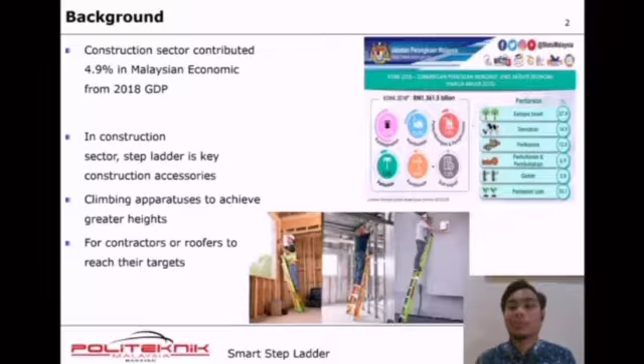Step ladders are also useful in the house or garden to reach things that are not too high, such as the ceiling. The challenge with the traditional step ladder is that it needs to be manually moved around.

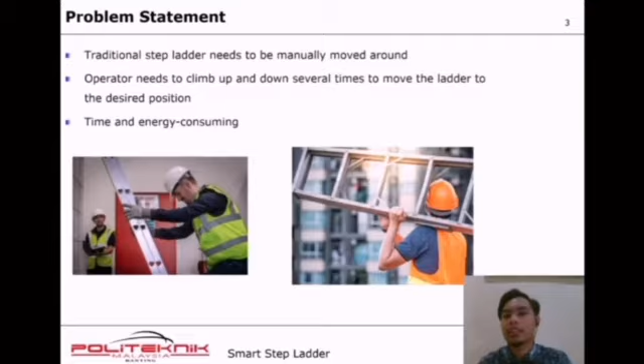The operator needs to climb up and down several times to move the ladder to the desired position. Thus, this is time and energy consuming.

Therefore, the objective of the innovation of the smart step ladder is to facilitate the operator in controlling the movement using a mobile application controller. Moving the ladder around will save time.

This saves time to complete the task since the operator does not have to climb up and down the ladder to change position. This will increase efficiency, make it faster, easier, safer, and reduce the energy needed from manpower.

This innovation targets light construction and maintenance work, as well as domestic use.

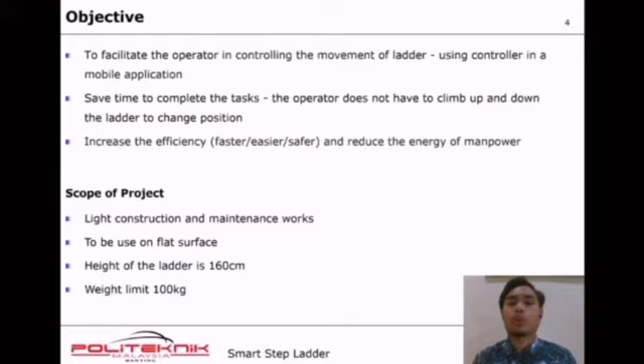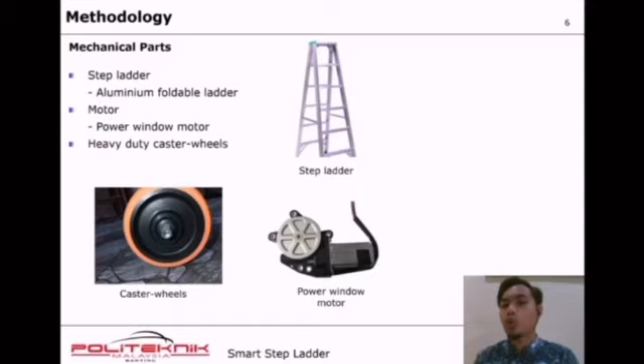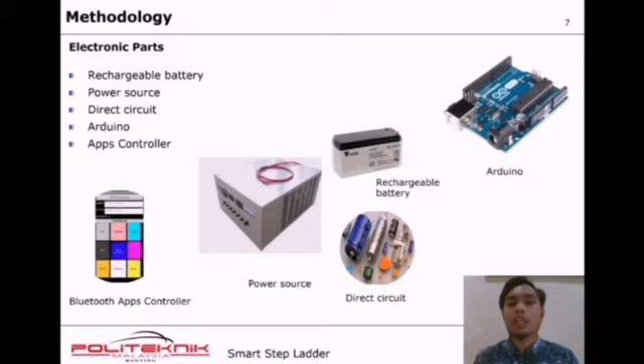The design methodology of this innovation started with a conceptual design using CAD Inventor. The mechanical part of the design includes an aluminium foldable ladder, a power window motor, and a pair of heavy duty caster wheels. The electrical part needed in this design includes a rechargeable battery, power source, direct circuit, Arduino, and an apps controller.

The design methodology of this innovation includes metal joining for fabrication of the mechanical part, and the electrical part that includes the power source connection circuit and rechargeable battery, as well as the programming part.

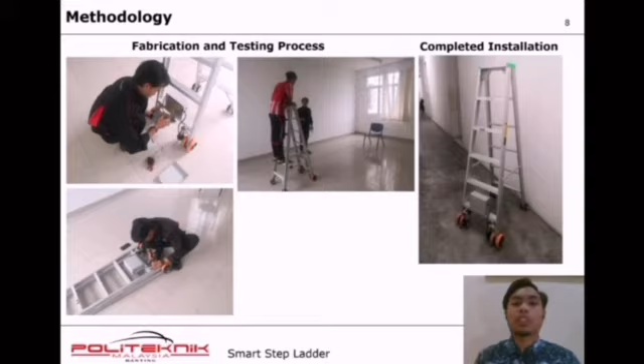The controller for movement of the smart step ladder by the operator using a mobile phone is developed using IoT and Arduino. The operator can control the movement of the step ladder while still on it, using either the input keypad on the mobile app or voice control.

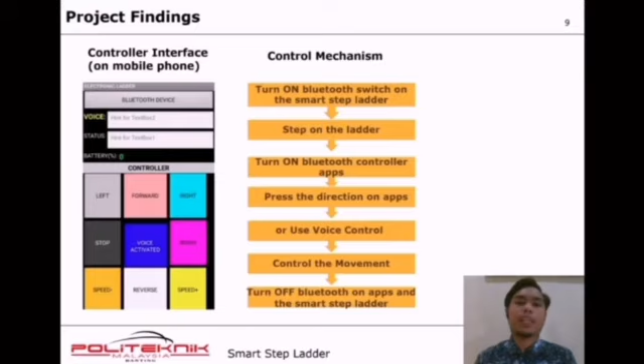Variations of smart step ladder movement using app control include moving to the front, back, turn left and right. Other important design criteria such as safety features, storage and maintenance are also being considered.

A speed test and load test were conducted during the development process to measure the capability and functionality of this innovation from the test results.

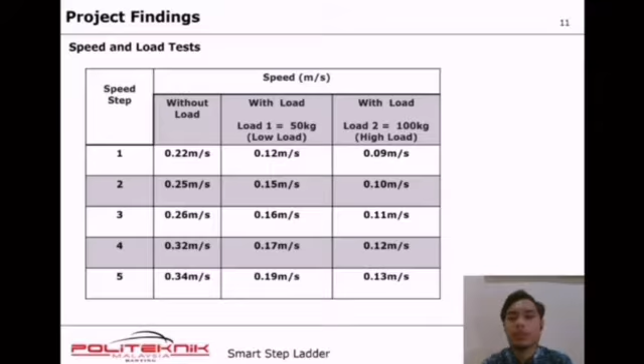Now let us look at the demonstration for this innovation.

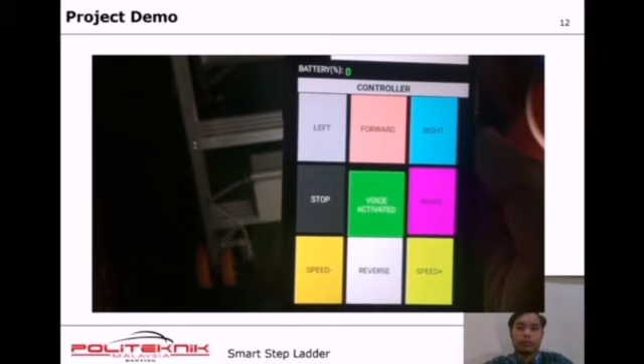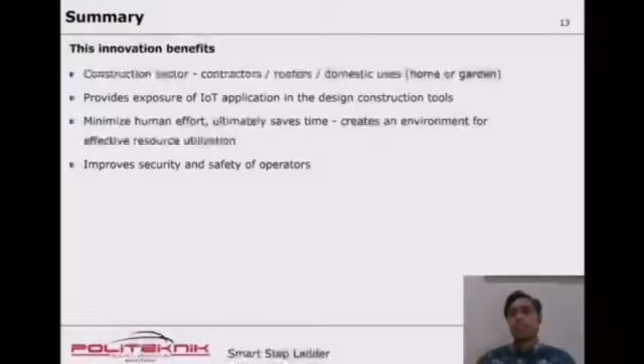It will move accordingly. Finally, I would like to summarize this presentation with the contribution of this innovation.

This will benefit in the following ways: the construction sector, with contractors and roofers, and domestic use at home or in the garden. It provides exposure of IoT application in the design of construction tools, minimizes human effort, ultimately saves time, creates an environment for effective resource utilization, and improves the security and safety of the operator.